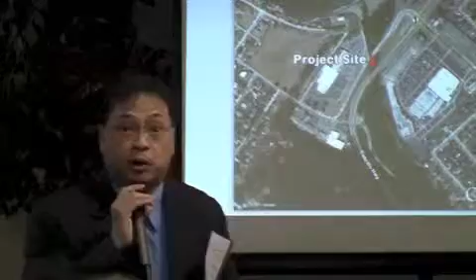Unfortunately, because of funding, we weren't able to do that. So the Army Corps project skipped this section between the two bridges. And now it's coming to reality. This project will complete that, and hopefully we'll get the benefit of a 100-year storm event capacity. With that, I'd like to turn it over to present some more detail about the project. As Dan had mentioned, later on we'll have the opportunity to ask any questions you may have about the project. Thank you.

Great, thanks. My name is Brandon Davis. I'm a project manager with Wilson & Company, civil engineers, and we are consultants to the City of Pacifica for the design of the bridge project. We're actually involved in the environmental phase as well.

As Dan mentioned, about a decade ago, the Army awarded a project here to the east of the bridge that was aimed to alleviate flooding in the Lower Linda Mar area. They expanded the floodplain there, and what we were left with, though, because there wasn't enough funding to replace the bridge, is a point of restriction. The bridge between the abutments is too narrow, the bridge is kind of low, so the flows really have a hard time getting out to the ocean. So we still have a potential for flooding here at the bridge site.

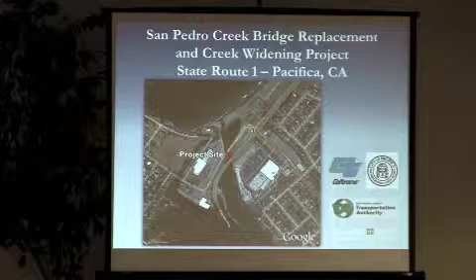As Dan mentioned, it doesn't meet the current seismic standards, structural standards, because it was built in the mid-50s. The bridge deck is below the flood zone elevation. There's no capacity for the 100-year storm flow within the creek to make it out to the ocean in this area. But there are benefits from this project.

The project is going to complete the Army Corps flood control project for the Lower Linda Mar area. It's going to expand habitat for two endangered species, the California red-legged frog and steelhead. It's going to provide a connection for a disconnected trail system. And it's also going to be constructed with current seismic standards and structural codes.

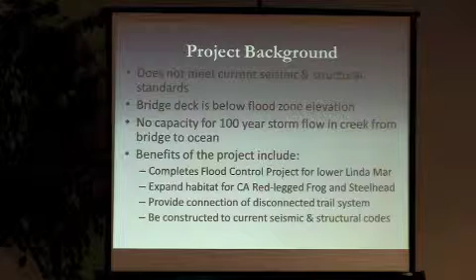For the status of the project, we've already been through the environmental phase. We've completed the CEQA and NEPA, state and federal environmental processes. We've got our permits, we've completed the design. The project actually went out to bid, bids were opened two weeks ago. The project will be awarded soon, and construction will begin in April. We'll continue through next year in 2015.

I mentioned the two species we have. There were a lot of permits that we had to get. For the California red-legged frog, U.S. Fish and Wildlife Service has jurisdiction over them. They had to issue their opinion, and they put constraints on the project, how it could be implemented while working around this endangered species. Same with National Marine Fisheries Service—they had an opinion for the steelhead, the fish. And even though we're continuing an Army Corps project, we still need to get a 404 permit from them because we are working within waters of the U.S.

Coastal Commission weighed in—they care about development within the coastal zone. We needed a CDP, a coastal development permit, from them, and they put their requirements on the project. Then we have California Department of Fish and Wildlife, formerly known as Fish and Game. They have a lake and streambed alteration agreement, since we'll be widening the creek to expand capacity, and they care about the wildlife that's there—that's a 1600 permit. Last but not least, Regional Water Quality Control Board has a 401 water quality cert, with requirements saying we're not going to put pollutants in the water and that sort of thing. So we want to make sure we're doing everything the right way.

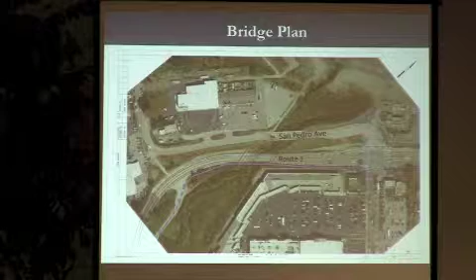So we looked at several different scenarios for how detours could occur. The first one: full closure of State Route 1 south of Linda Mar Boulevard. We just take out the bridge and then nobody can go south. If you want to go to Half Moon Bay, you'd have to go out and around, back through. Not really the best option.

Then another scenario we looked at is a split detour, and there are actually two flavors of split detour. The first being keeping northbound traffic on the existing bridge. We take the southbound traffic and move it out to San Pedro Avenue, and that southbound traffic will go around the project, but the northbound traffic would stay on the existing bridge. We cut the bridge in half, demolish half, build half of the new bridge, move traffic onto the new bridge, demolish the other half, build the other half, and move all the traffic back. It's kind of a complicated way to do things, with staging that needs to happen.

The second split detour option would be to place a temporary bridge in between the existing Route 1 bridge and the existing San Pedro Avenue bridge. That then has the benefit of allowing us to just take the whole bridge out at once and build a whole new bridge all at once. There's some significant time savings in doing that.

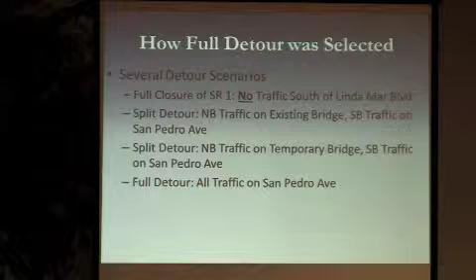The last scenario I'd like to talk about is a full detour, whereby all traffic north and south on Route 1 moves to San Pedro Avenue. We're actually going around the work area, and I'll show you what that looks like in just a minute.

But we looked at each of these scenarios and we had some selection criteria. Our first being delay - not only the day-to-day additional time it's going to take to move through the project, but the project duration itself. As an example, the full detour where all traffic goes to San Pedro Avenue, that project will take about a year and four months. If we were doing the one where we're splitting the existing bridge in half, with traffic staying on the existing bridge while building half the bridge, that was another two years longer, so three years, four months. So even if the delays end up being within a few seconds of each other, if you take the extra two years times those delays, day times the length of time, it just becomes long hours of delay over the course of the project. So that was an important consideration.

The next selection criteria is environmental impact. Now, all of the scenarios have environmental impacts, but when we stack them all up, there are a lot that are the same, and then some options have additional impacts beyond what the others do. As an example, maybe the temporary bridge - putting in the extra abutments and then coming back at the end and taking out the extra abutments for the temporary bridge - added extra environmental impacts. We probably needed to do more studies if we were going to go that way, and mitigate those impacts so that the permitting agencies were okay with what we were doing with the project.

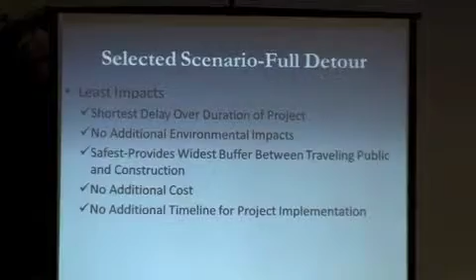I'm going to show you what this looks like in just a second. But the selected scenario is the full detour, and the reason is it has the least impacts. It has the shortest delay over the duration of the project. There were no additional environmental impacts. It was the safest, with the widest buffer between the traveling public and construction compared to the other scenarios. There's no additional costs and no additional timeline for the project implementation.

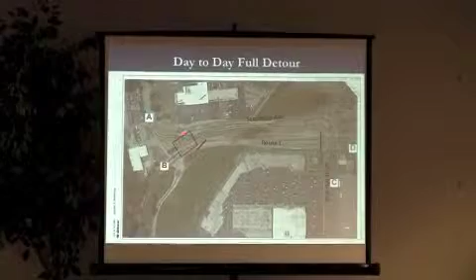So let me jump ahead. This is what the full detour looks like. It has a temporary intersection here that allows people to get out of Pedro Point. And then it has Linda Mar blocked off here and here.

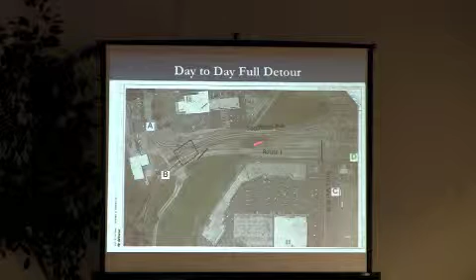So if you're traveling south on Route 1 and you want to go from D to either A or B, you take a right and head down San Pedro Ave, cross the San Pedro Ave Bridge, then there's a new curve that pulls off and heads back to Route 1. Same going the opposite direction - this new curve, you come along and go across San Pedro Ave and back to Route 1. That allows us to close off this part of Route 1 and do all this work without having traffic driving right through the middle, and it allows us to work faster and be safer.

But what is happening - and even in the two split detour situations I mentioned, where part of the traffic detours on San Pedro Ave - there's a need to have this intersection, because we can't not let people get in and out of Pedro Point. If we didn't have this intersection, the traffic would just constantly be going back and forth, wait. So there will be a temporary signal here.

What that means is, in addition to the current wait times you have at this intersection, there's going to be wait times at this new intersection, and it adds 30 seconds for most trips. There's one exception to that - it's longer, at one time a day. But I'll get to that in a second.

In calculating these wait times, it's also important to realize that it's a worst case - it happens in the morning peak, when people are leaving, trying to go to school or work, or just getting out for the first time of the day, and then in the afternoon peak. So when we're off peak, these wait times are going to be less. Now I say up to 30 seconds, but the range is really like 18 to 28. It depends on where you're coming from and where you're going. But let's say 30, because that's an easy number for people to visualize.

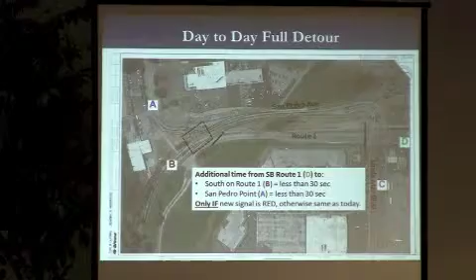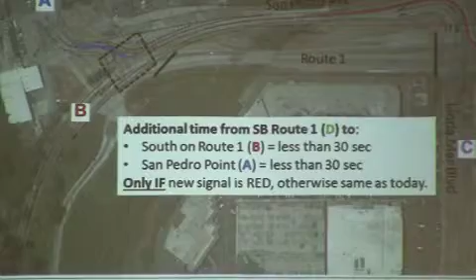Those wait times. So this red movement coming from D headed to B, southbound, continuing southbound, or D headed to A, southbound headed to San Pedro Point, again less than 30 seconds. I will point out though, that's only if the signal is red. That means that somebody is coming out trying to get out and head north, or somebody is coming in trying to turn in. They've triggered that signal, stopped you there.

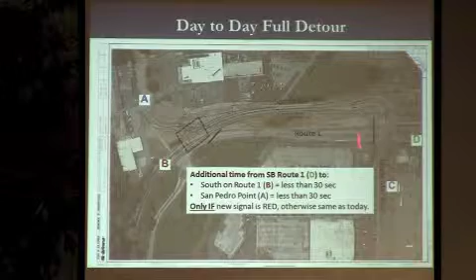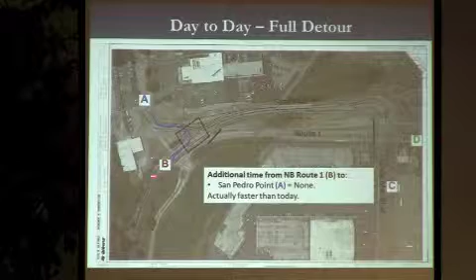Next slide. For people coming from the south, headed into Pedro Point, it's actually faster than it is today. That's not to say you're not going to stop and wait here. You will, but the wait time here is less than the wait time here. And you don't have to drive up and then wait and then drive back, you just have to wait and then drive. This is a faster cycle, considerably faster, on this intersection than on this intersection. So in actuality, this is going to be faster than it is today.

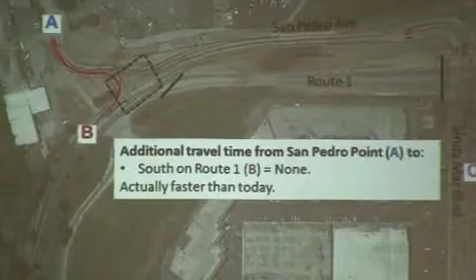Same in the opposite direction, and actually faster than today. This is our exception. This is afternoon peak hour, which is running around 4 or 5 o'clock right now, based on recent counts. Historically, it's been as much as 5 to 6. The last count showed it about 4 to 5 o'clock.

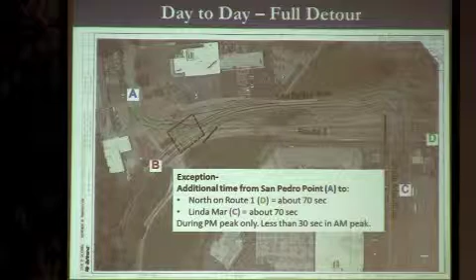So here is the construction schedule. It's divided into seasons, and I'll explain the reason for the seasons, or why I call them seasons. But construction will begin mid-April of this year. Detour preliminary schedule for detour construction will take about 6 weeks. The contractor's going to come on board and they'll have their own schedule, but it'll be pretty close to this.

But it'll be about 6 weeks, and we'll be switching traffic sometime in June into the detour. Once the traffic is switched, we'll be off the bridge. That'll allow us to demolish the bridge, and we can get into the creek.

Begin the creek widening. Once the widening is complete, the creek will be restored. It'll be revegetated, so we'll grow back all of that vegetation that's out there and create the additional habitat for those 2 species.

Do the foundation construction. That'll be going on between June and October. So if you remember back to the beginning when I talked about all those permits that we had, and those 2 species, the frog and the fish, that are endangered, what's really going on here is that between mid-October and mid-April, those species become active.

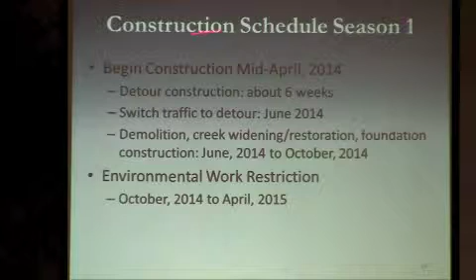Those permits and biological opinions that we have don't allow the big construction equipment work to be going on during that time. So between October and April, it's really going to seem like there's not much going on out there at all. That's why I'm calling this a season. So this first season will end in October.

Then we'll come back next year, mid-April, continue on the project, complete the bridge, bring in the girders, the topping slab will go on, add the bridge rails, build up the embankments, put the pavement down, do the striping, finish up the minor items around, switch traffic back to Route 1, probably October,

and remove that detour, and then construction will be complete in 2015.

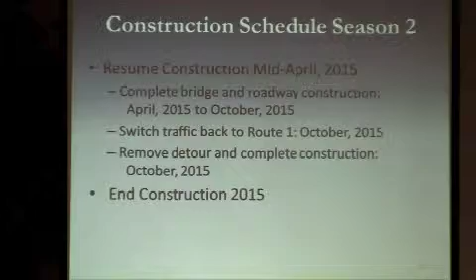All right, in a minute I'm going to turn on a simulation that Richard, your traffic consultant, put together. We only have one projector. What that's based on is recent traffic counts. It shows the detour configuration.

It shows the cars pulling up to the intersection and queuing up and waiting for the signal. The signal's turning, and the car's driving through the intersection. It's going to be running at an accelerated pace because it's the peak hour, and we don't want to sit here for the full hour and watch it go over time.

So it's going to be an accelerated animation that you can kind of get a sense of what's going on. For more information, Caltrans currently doesn't have a website, but when it's created, it'll be in place for construction of the project.

That's going to be a place for additional project information. There will be regular scheduled updates on that website. And if you're having trouble finding that, the city's website is also going to have a link to that.

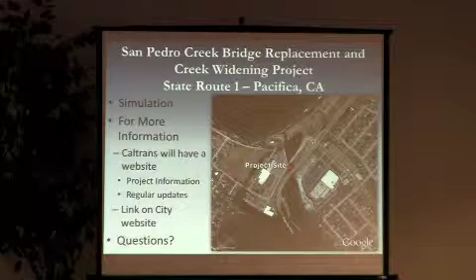Thanks, Brad. So actually, as they're setting up the simulation, which is kind of fun, just watch the little cars move around high speed. But we can start taking your questions.

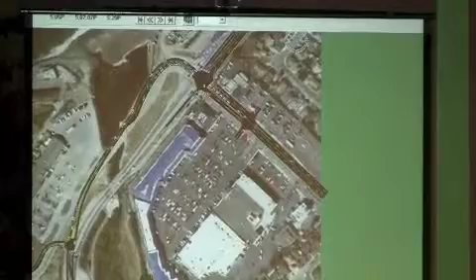And lastly, related to the increased amount of traffic, will there be any, I imagine that's going to cause a significant amount of wear and tear on San Pedro Avenue. Will there be anything to address that after the detour is taken away? Yes. The road will have to be left in the same condition that it's in today.

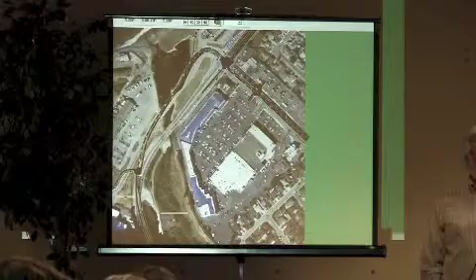Thank you, Chris. Yes, hi, I'm Joanne Gold. I'm a Pedro Point resident. Can you speak a little bit to any of the pedestrian routing during the construction phase? Okay, so currently we don't have any sidewalks up and down the route.

Hi, my name is Marcia Settle, and I also live on Pedro Point, as most of the people here. My question is, although Highway 1 does not shut down as often now that we have the tunnels, there still are incidents where it closes and traffic all backs up on San Pedro. I want to know if there are any contingency plans that have been thought about for how to handle those situations.

Anybody? From the silence, I'm kind of guessing the answer is no. It is. So right now, I think it's the same thing, a significant problem when they close. Yeah, so should that happen, that would be something to look at. But thank you for raising that, we'll chase that one around with these Caltrans engineers. Good going, Marcia, you asked the question, they got us in trouble.

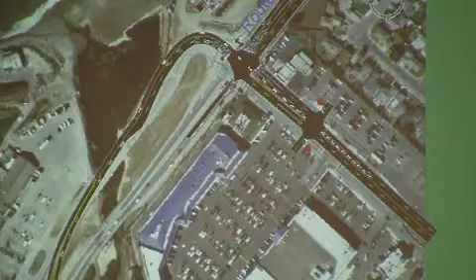Sir? Yes, my name is Ernest Hayes of Pedro Point. You did mention just now that the pedestrian access way will stay the way it is, but what have you considered with respect to additional fumes for people walking along there? Is that part of the environment? Has that been taken care of at all? Thought about?

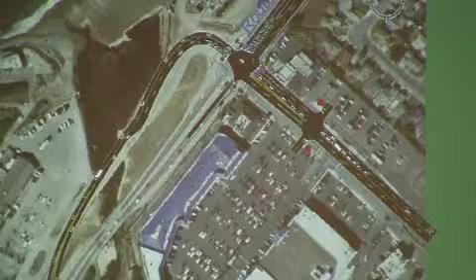The additional impact from idling cars. Well, we're still talking about the same volume of cars in a different area. I know that traffic was assessed as part of the environmental studies, and we're not expecting increased traffic in the area as far as the air quality goes. In the environmental studies that we did, there was not a significant change.

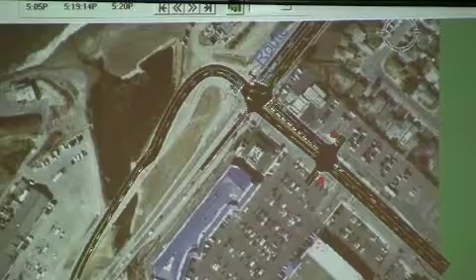So there's nothing to mitigate the additional fumes coming from vehicles as one crosses that bridge, the existing pedestrian bridge? There's nothing to mitigate the additional fumes because it's not a significant increase. That's for a year and a half, additional fumes for people walking along there. Is that right? Right. Thank you.

So what they're saying is that when the study was done, it was deemed that it wouldn't have a significantly measurable impact on air quality at the moment. Now that may be indicative of what air movement is and a variety of other factors in that, but that's just what the report says, so there wasn't any other permit requirements put on that. I understand your concern, there just wasn't any other permit requirements put on that one.

Yes? Okay, and your name? I live on Pedro Point too, my name is Alice. A couple questions. The first one is, are you envisioning the cars traveling the same speed on this detour as they would normally be traveling on Highway 1? Because that's a big difference. Right now that road is more or less a 25-mile-an-hour speed limit zone, and of course Highway 1 is about a 50-mile-an-hour speed zone. So are you envisioning that the traffic is going to go at the same speed as it does now on Highway 1 through that detour?

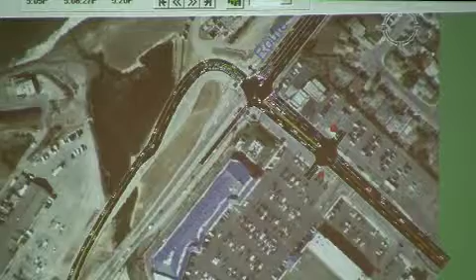So the pedestrian route in practice - the only formal pedestrian route is along this left edge you're talking about. It comes down to this intersection, and you need to cross here and cross here. That's the route they're going to use, and it doesn't put people on the other side. This is already tight - pedestrians are given like 2 seconds to get off the curbway if you want to cross Highway 1 at all. If there's also essentially Highway 1 traffic going through there, it's going to get a lot hairier for pedestrians in practice, so you might want to look at putting a crosswalk on the other side.

The pedestrian timing is going to stay the same here - not the timing, I meant a crosswalk. We're not legally allowed to cross on the other side, as you know. Right, so that is not changing at this point. But good comment.

Thank you, yes please. I'm Margot, also a pedestrian and a resident of Pedro Point, but I do have a pedestrian question - you're allowed to go any way you want.

I have a continuing pedestrian question about right now - if you're in the NorCal parking lot heading across the San Pedro Bridge, right at the north corner, it's pretty hairy the way it is right now because the sidewalk there is right next to the road. I'm wondering if you are going to install any barriers between where pedestrians will be walking and the road, because it's dicey right there now even at 25 miles an hour.

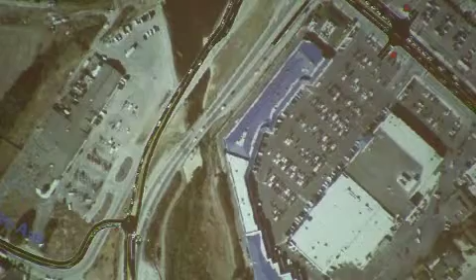There is not currently a plan to place barriers there. There should be - there's no sidewalk there, there are a line of plastic bollards there, but not a concrete barrier currently. I know this was not a meeting for input, but there it is. Thank you, that was good input anyway.

Jim Lang, I live in Lower Linda Mar, so I'm on Balboa, so I'm benefiting from this project. My question - when they introduced this project in 1995, the floodplain project, at that time the bridge was part of that project, the final step of it. At that time I was under the impression we'd be able to drop our flood insurance. I wondered if that was any part of this anymore.

As I mentioned earlier, this project actually completes the first phase of the flood control project of Lower Linda Mar. So what we intend to do right after we complete this project - and since it widens the creek to provide the 100-year storm flow - we will approach the Army Corps of Engineers so they can evaluate the area. Because that's a federal agency, they'll contact FEMA so we can see what can be done regarding your insurance.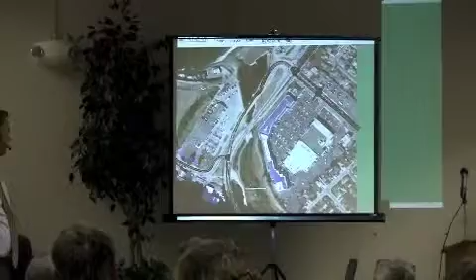Chris Vogel again. I was wondering if you could point out on the map where the staging area will be for all the equipment and construction material. Staging is anticipated to be done within the right-of-way, which will be blocked off. This detour creates an area that's not being used, so we are anticipating staging to occur within the right-of-way on this side and within the right-of-way on this side.

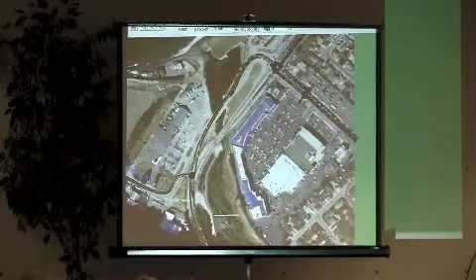I have two questions. One is, what is that very primitive-looking, very permanent concrete structure that's there now? Is that part of your project? There's a building now right near where the intersection is, and all of a sudden it's there.

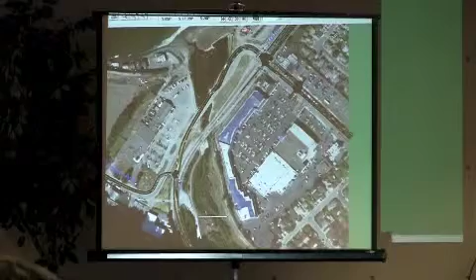Oh, right here? Right there - that's the water district's pump house. Okay, the water district's pump house. So that has nothing to do with this? Not this, okay. That's actually for the tunnel. Do you know if it's permanent? That's for the tunnel, okay.

My second question goes back to thinking more about the driveways for the parking. All of us who live on the point experience people just pulling out of the parking lot without looking to see if there's traffic on San Pedro. I assume everyone's going to be going out the exit on San Pedro because it'll be too hard to get back on the highway. This will be a right-out, so you won't be able to turn into that direction. So is anything being thought of to make that a better exit? I know some of that is Caltrans property, but people can't necessarily see cars on that part of San Pedro, and they just pull out of the parking lot. I wondered if that's being looked at, something that needs improvement for the flow of traffic. No, for this project there are no improvements to this driveway.

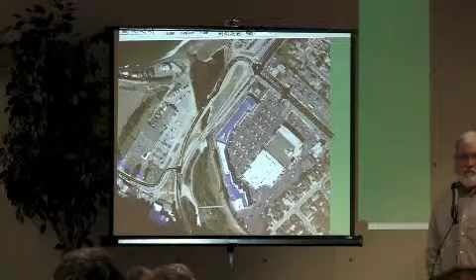That's it for us. Sheila and I live on this point, and you answered part of my question. So the only exit from that whole shopping center is at the south end - if you go past Fresh and Easy, there's a little driveway there. Is that the only exit from the shopping center? So there's this exit, and then there's this exit here. But you can't go left out of that one, you can only go right, because this traffic is coming in - you'd be waiting here for ages. Yeah, I get that part.

One, so this road is going to go in front of that water building that's just been built. Which is behind it, here? The water building will be here, or it is already there. So in relation to this, its location will stay the same.

The other thing is I've been over to Coyote Hills, a nature preserve in the East Bay. They've had a lot of trouble with cattails taking over the whole area, in fact there was no water left. So I wondered if there's going to be some mitigation with the cattails, because they've really proliferated, and is somebody going to maintain it if this is the opening of the widening of the creek?

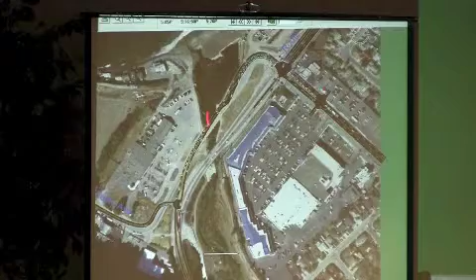By walkway, you mean for pedestrians or for wildlife? For wildlife. Okay, so beneath the new bridge in the reconfigured, regraded situation, there is a low flow channel that'll wind through, and then a floodplain elevated above that. So when there's not big flows, there's a place with firmer ground that can be walked upon, and that happens on both sides of this area in the regraded stream. So deer would be able to cross, and does deer go to the beach? Yeah, deer can walk.

And the third is just a comment, that we were all actually surprised that this project was even happening, and all of a sudden we got a note in the mail saying, hey, come and listen to this.

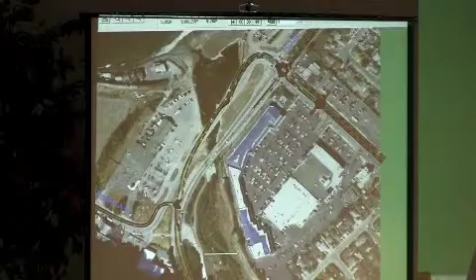There seems to be a consistent theme from Caltrans and the city that there's really poor communication as to when these projects come. I'm sure all my neighbors would have loved to have commented on this project, and I doubt you got many comments from us, and we try to stay on top of this quite a bit. We have a community association. The fact is, for most of us, including myself, this is one of the first times we've even heard this project exists. We were all shocked that something was even coming. So in the future, especially with the debacle that's going to be occurring with Highway 1 and the Calera Parkway widening, we need better communication on those. This was just done poorly as well. I'm really happy you did this information session, but it seems like it's a little too late for us.

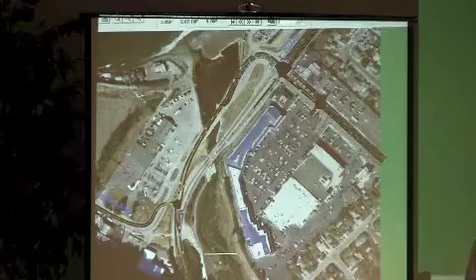Hi, I'm Danny Estrella, a resident of Pedro Point. I want to follow up on what Marcia and Sam said, because the exit from the Fresh and Easy parking lot is going to have a lot more traffic. Your studies were over the last 10 years, but the last 2 years the traffic flow has changed dramatically with the installation of Fresh and Easy, the influx of the surfing population, and the opening of other businesses there. There's a lot of traffic now. You really need to take a look at this closely, because there's a significant safety hazard exiting from that parking lot and turning left.

As it is today, even without the enhanced traffic coming through there, it's a blind corner. If you go down there and stand at street level, there's a lot of vegetation blocking visibility to see traffic coming from the north heading south. You add more traffic flow onto San Pedro Road, more traffic coming out of the Fresh and Easy parking lot, and you're increasing the risk of collisions. You had 10 years of reviewing it, but you need to look at the last 2 years of what's going on today. The city should listen to this too, because I'm making a statement that it's a safety hazard. Anybody who gets in an accident is going to refer to my comments tonight, that you were warned.

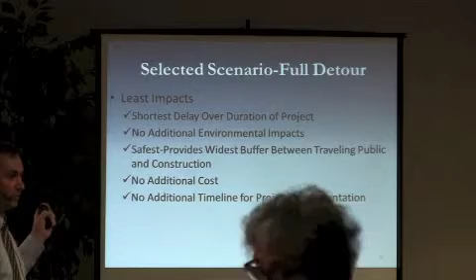So this was the criteria that we had for selection: delay, project duration, environmental impacts, safety, timing for project implementation, and cost. This selected alternative had the least impacts on all of those compared to the other ones. So it was the shortest delay over the duration of the project.

There were no additional environmental impacts. There are environmental impacts, but some of the other options had significantly more impacts that need to be mitigated. It's the safest, it provides the widest buffer between the traveling public and construction. No additional cost, and no additional timeline for project implementation. And that was important because of funding deadlines.

Hi, my name's Matt, I live on the point. Sam's hit on a few points here, but the word boondoggle came out, and I think that's really the way this thing is playing out. Because if this was a 10-year plan, you haven't taken anything into consideration in the last 2 to 3 years.

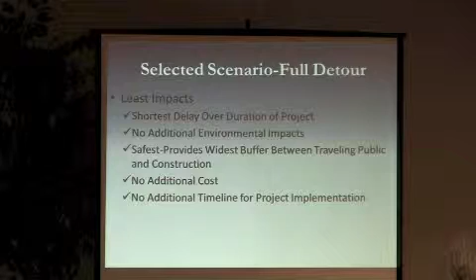That parking lot at Fresh and Easy, when I drove here tonight, we drove down that frontage road to get here, heading north, and there was 20 cars going down Coast Highway 1. There was 8 or 10 cars going north on our frontage road. The shopping center was completely full, every parking place was taken. What do they call those little shopping centers, like a strip mall? Yeah, a strip mall. It's gotten really popular, there's a lot of nice little restaurants there now, and it's really gotten heavy use.

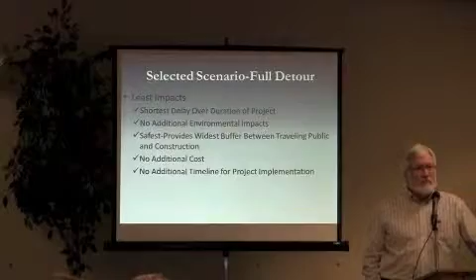This is not going to be functionally possible to run the traffic from north and south and have us be able to get on and off the point. I don't care how good these stop signs are. It's a mess now. When you got people coming from Linda Mar, they cross the highway at the stop sign, there's no place to walk but right out in the middle of the road in front of us. When we're going down that road, there's 4 or 5 kids at a time. You've got to really watch your P's and Q's on that road. And I don't physically or mentally see how this is going to work for you guys.

For us, we don't have any choice, we live there, you know. But I think there should have been a lot more input. Like Sam said, we knew nothing until I got that thing in the mail.

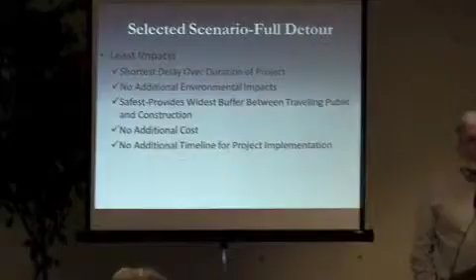This guy walks there every day for the last 10 years, four times a day, and all the ladies that walk off the point, they're always walking the same way, back and forth all day long. It's a very dangerous situation, and I think we should maybe put a little input or thought into this.

It's just, you shove it down our faces, and we're not ready for that. We're sort of like a progressive community right there. We're survivors, and the population using all the trails, fields, walking, dogs and people has increased hundreds of percent in the last 5 years alone.

They built that new playground at Pedro Point. There's 100 people a day that walk from that parking lot through the field behind my house to that playground for kids and the dogs. It's just nothing the way you're describing it.

You're describing from an educational point of view how it's supposed to work on the highways, but I cannot see it functioning practically for any of us. We're going to have a very hard time dealing with it.

Right now, we can come out of Fresh and Easy and go left, down this frontage road. But now you're telling me we can't go left, we have to go right. There's one little driveway, and like Mr. Danny said, there is no vision. It's a blind turn, and so many people come out of Fresh and Easy driving about 2 miles an hour, which you have to do.

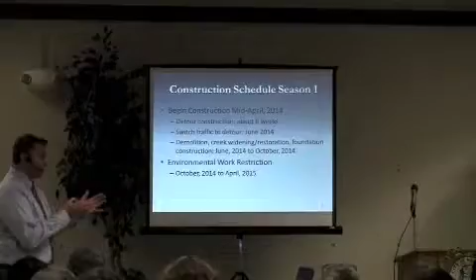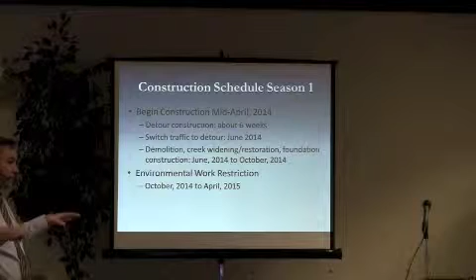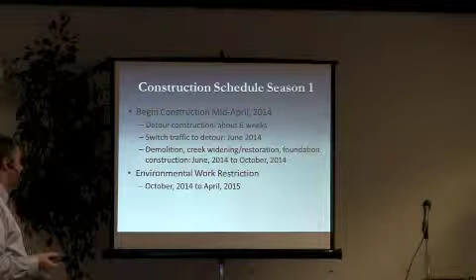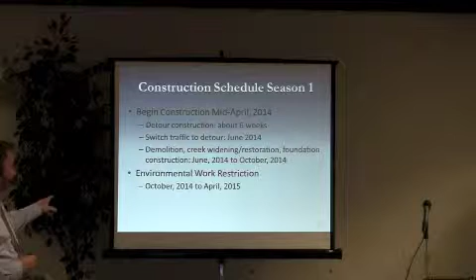Again, we're trying to fit our work within this window of June to October within the creek, as the fish doesn't allow us to work between October and June in the creek. The environmental agencies just won't allow it. Beyond that, the frog outside of the creek, anywhere around the project, limits the work we can do from October to April. So we're trying to do a bunch of work, and there's some lead times.

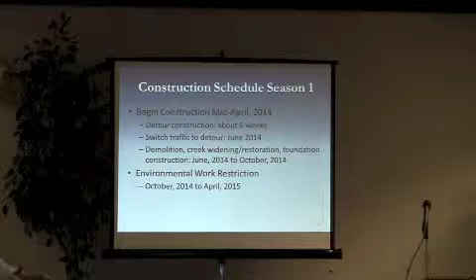The stuff's just got to get in there. The foundation's got to be set. They've got to cure before we put the girders on them. And by the time all of that's getting ready to get the girders, we're hitting this window, and then the reg agencies are saying no work.

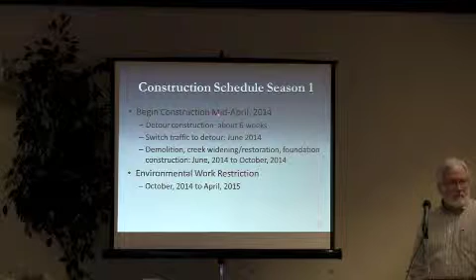Why didn't you start it earlier, where you picked that window? We're going to start as soon as we can. We can start in April, so we're going to start in April. The window is October to April, so we're starting mid-April.

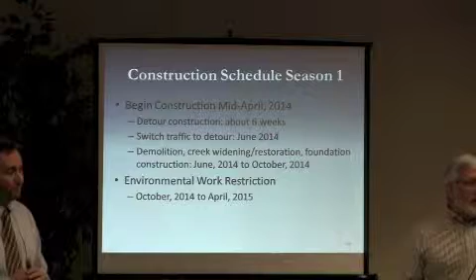That's controlled by environmental permits, that there's a block of time that the environmental permits do not allow any construction work to take place, period. It may not seem logical to us looking at it as dead space, but that's part of what the environmental permits require. How long does it take to build the bridge? A little longer than you think.

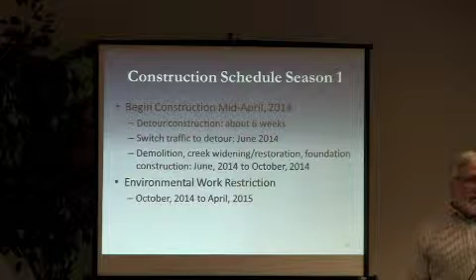Actually, the most important thing is, I'm the non-engineer of this, but I'll just speak to this. Part of your challenges is what he just talked about. The first period deals with putting the building the land up and letting it cure and settle.

They kind of, in my neck of the woods, I won't name the project, but they seem to have rushed that. So what we ended up with is the land settled after the bridge was built, and we've had this fun thing happen as you approach the bridge where you mess your car up on a regular basis. So that settling and curing is a very important process, and it takes a little time, but it's just a construction schedule.

Well, it's also got the sequencing. We've got to build the detour before we can take the bridge out.

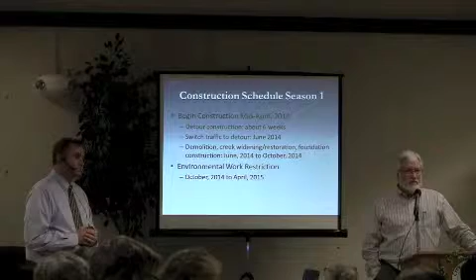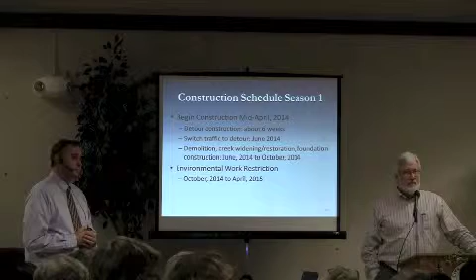I think, probably not popular with the Pedro Point group on this, but it's just a misunderstanding. On the parking lot, I go over there a lot, and most people leaving that shopping center go northbound, so it's that left turn that now won't be allowed. I wonder if it'd be safer to block off those three driveways so it's only an entryway in, and everybody would go out the frontage road. That's safer than somebody trying to make the illegal left turn and backing up the parking lot, since that right turn is almost a moot point - you're only doing a half circle to get back to the driveway you'd pass to go out anyway. If they made it just an entryway in on both sides, it would get traffic off San Pedro Road into the shopping center easier, and eliminate people making the illegal left turn, which will be the majority of people leaving that parking lot, I'd assume.

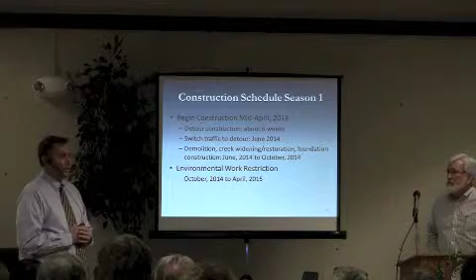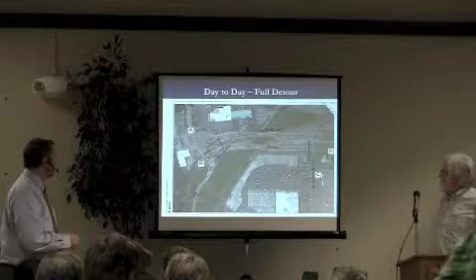Yeah, it's set right now as right in, right out. This one is actually blocked, so we're not having people trying to come out in two different places - this one's right in, right out, and this one is in and out. I think the city has said they will look at the vegetation and pulling it back so that it improves sight distances there.

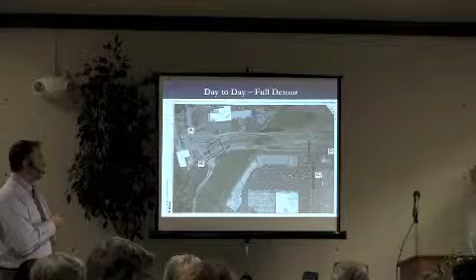Yeah, pedestrians don't cross this way, they do cross this way. In the detour configuration, the right turn lane is actually pulled out of the pocket, so we've increased the radius by pulling it away from the curb. So you can now make a right turn from the lane that used to be the through lane - you've got more room to make that turn, and then it's just striping it.

Was that the limit of the discussion? I would imagine it was discussed somewhere at some level to make it easier to make that turn, because you're going to have a lot of cars.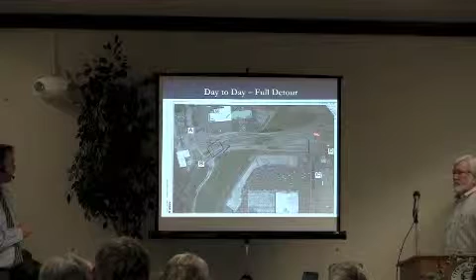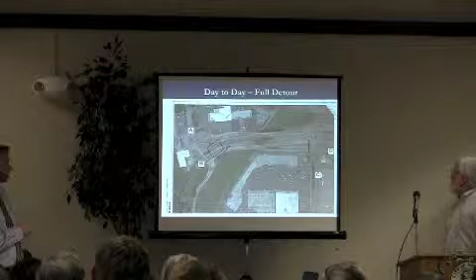Yeah, so there's two lanes going left into the Linda Mar, two going straight through, and there's a dedicated right turn lane - one lane able to make that right turn. Nobody's going to be able to go through. There are still going to be two lefts - that's not changing. So we've got all this extra space here. We're not going to move the curb, we're going to pull the traffic away from the curb, creating a larger radius there. This will all just be striped, so people can drive within there without worrying about hitting the curb. They've effectively got more room because of it. Okay, not so tight, yeah, I got it.

Okay, you had another question? Yes, so...

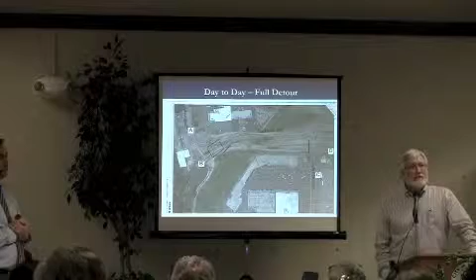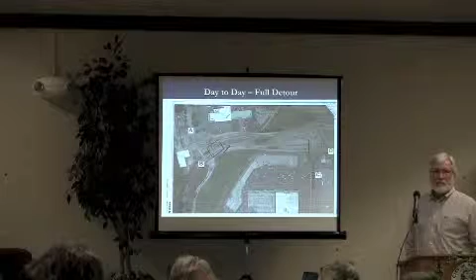There was a discussion earlier about a possible tunnel for animals, but since we're talking about it, was there ever discussion about a simple tunnel for safety, for people crossing Highway 1 there, now that the traffic's going to be down? A simple tunnel, a few steps down, get underneath, don't have to worry about any car, don't have to worry about dogs, and then pop up on the other side. And have it available for both underground crossing and above ground crossing, in case you're in a wheelchair or something.

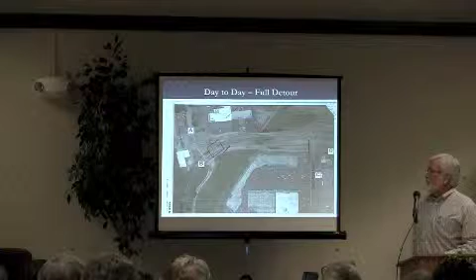So there is a new pedestrian walkway that's going to run up along this side, separated and protected from the roadway. When it's adjacent to the roadway, there's a barrier. It doesn't go under the bridge, it goes over the top of the bridge and directs people up to this intersection. There's no sidewalk on this side here, and there's no plan in this project for a sidewalk on that side, so a connection underneath doesn't really need it.

So at this point, the answer to your question is no, it's not a consideration at this point of the project, but it's a good idea, thanks for your question. Okay, and did you have another one?

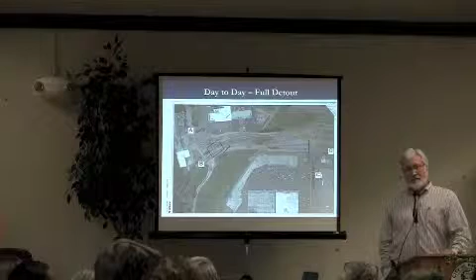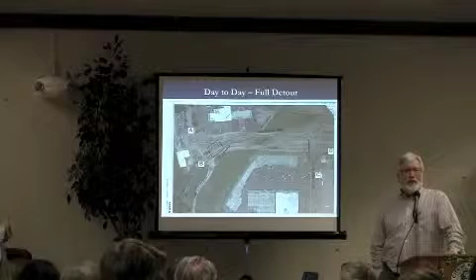But I got this feeling it's not going to really turn out that way. It's a construction zone, an unpredictable flow of traffic. And everybody's off work, they had their hard day at work, they got to make sure they get the groceries, pick up the bread, get home, pick up the kids. At that time of day people really want things to go smoothly, at least as best as possible. They know a lot of effort was taken.

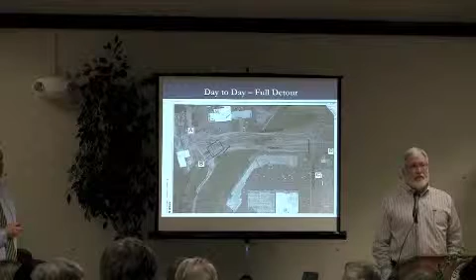That analysis is just sped up because it's kind of boring to watch it at slow speed. But the reality is, it is the best analysis on traffic flow. Those are the basic standards traffic consultants use when they plot those things out, to figure out the timings they need for lights and all that kind of stuff.

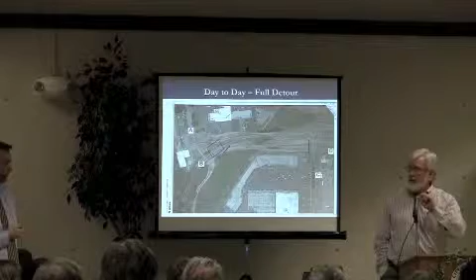So, as Brandon said, there will be delays. The question is, how long are those delays? We're hoping that, except for that one peak time in the PM, those delays should be measurable in seconds, not minutes and hours. Let's see how it works. Like any project, you see how it works, it has a plan, we'll see how the plan works.

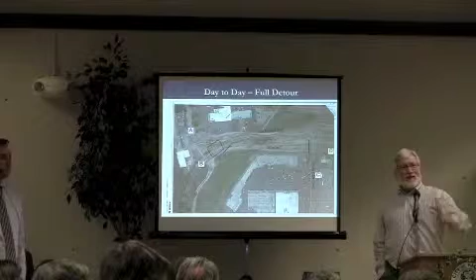Hi, Durango. So I'm listening to all my neighbors and a lot of the questions, and they seem to be less about the traffic and construction and more about quality of life, the pedestrian walkways, where people are going to ride their bikes, how they're going to get across. So I guess my question is, did we miss something? Was there an opportunity where we would have had the chance to bring these to light before all these decisions were made and decided upon? Where was the public input? Not that we have a problem with the bridge, the widening, and we certainly don't want to flood, but all of these other considerations, especially, as Matt was pointing out, things have changed so much in the last few years. The volume of people really embracing the recreational capacities of the Pedro Point community and the whole Linda Mar area, that's essential to why we live here.

And those are all a sidebar to a Caltrans question. Obviously it has nothing to do with highway and cars, but it has everything to do with why we live in Pacifica. So my question is, maybe it's to city council, city planners, or somebody else, did we miss an opportunity? This was the first time I think most of us heard this was going on, and we would have loved to bring this up before everything was too late. Did we miss it? Does somebody have an answer to that?

There's always, I believe, a process, part of the permitting process requires public hearings. I don't know exactly, but so at some point there was a public hearing, now I can't tell you when that was. Can somebody say? David?

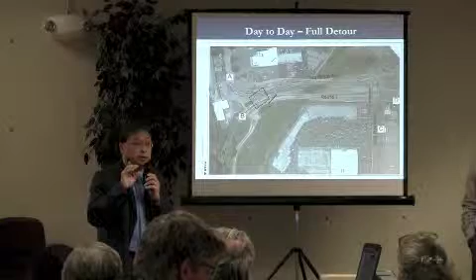In addition, with regards to information about the project, as pointed out by both Brandon and Tim, Caltrans will set up their website which will provide regular updates on this project. We will also put a link on the city's website so it'll be easier for you to navigate and reach that.

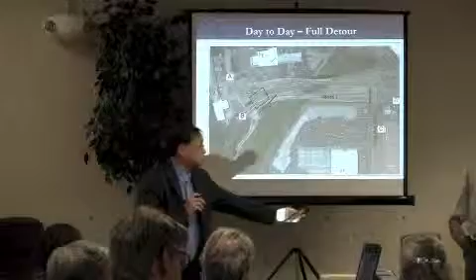I have just one question - my name is Diane Jefferson, I also live on Point. Do you have any plans to now evaluate the flow of traffic and the time required, and then say 3 months after the detour, re-evaluate to see what kind of impact it has made on the traffic, and at that point, based on that evaluation, take some other action if at all possible?

The commitment Dan spoke to - I think the only thing in the plan right now is an operational plan. So within the operational plan, when the standards they've talked about here are being exceeded inappropriately, they will make some adjustments. However, the adjustments are within the system as it's designed. Predominantly that would be adjustments to the timing of lights, not a rerouting. The rerouting would be a major construction add-on cost and would be prohibitive at that point.

More importantly, it's scheduled. It would add on, which would just cause a ripple effect. And suddenly something that's going to impact you for a couple of years would go for 3 years or longer, that kind of thing. We'd like to limit that time impact on you as well.

The theme here is the communication - the presentation is, this is the plan, this is what we're going to do, and this is what you have to live with. We are asking also about better communication in the future with the city, with Caltrans, as the projects are developing. On this particular project, we're talking about impacts happening as the project begins. Will we have an opportunity to provide you with data, with information of our personal experiences negotiating through the pedestrian paths here, to alert you to any significant safety issues that you can act upon? Is there a place we can communicate to you?